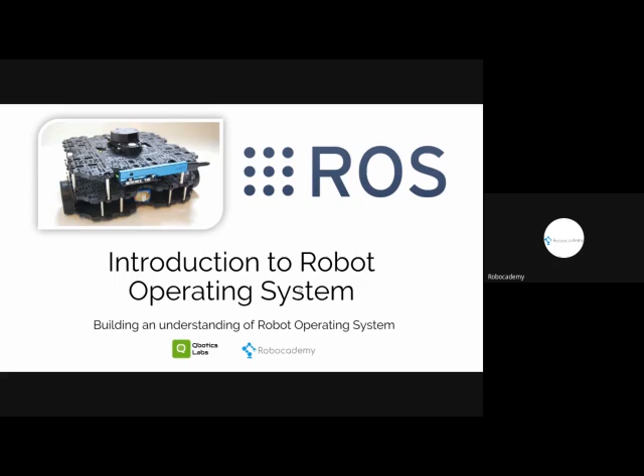Okay, fine. So myself, Lentin Joseph, I used to write books on ROS. I have written about 8 books. These are the titles. All the books are related to ROS: Learning Robotics Using Python, Mastering ROS for Robotics Programming, ROS Robotics Projects. And I also used to review books in robotics. So these are some of my books, and these are some of the books that I reviewed.

Regarding my experience, I started working in robotics in 2010, from my engineering project itself. After that, I worked for a robotics company called Asimov Robotics. You may have seen some news nowadays regarding a robot called KARMI-Bot for COVID patients. So I worked in that company, and in 2014 I started Qbotics Labs. It's mainly a robotics consulting firm, and after that I worked 6 months with CMU for a research project.

And this is my blog called Robocademy. It's mainly for sharing robotics tutorials, news, etc. This webinar will be based on my book called Robot Operating System for Absolute Beginners. It's designed for people who don't have any idea about ROS.

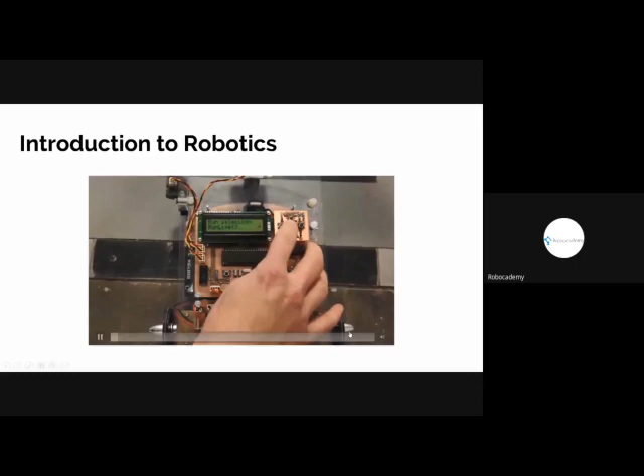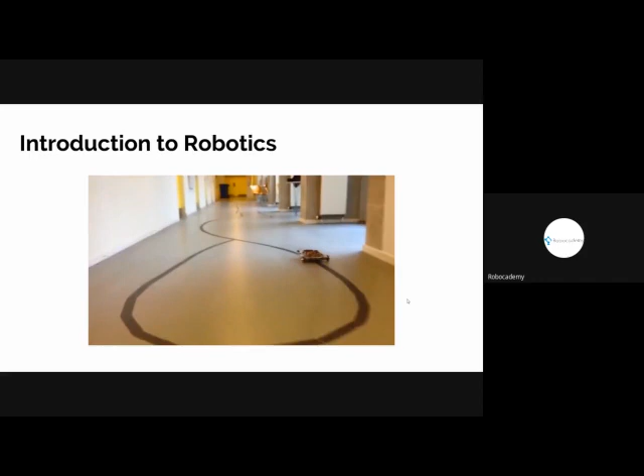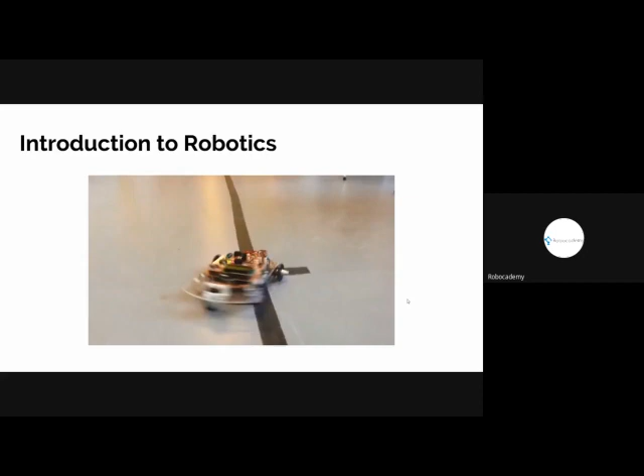Okay. So just watch this video. I think you can all see this video now. So how many of you have seen this kind of robot? I think it's very common. It's called a line follower robot. The purpose of this robot is that it just follows the line using some sensor, right? So I will say this is one of the basic robots that we can make, a line follower robot.

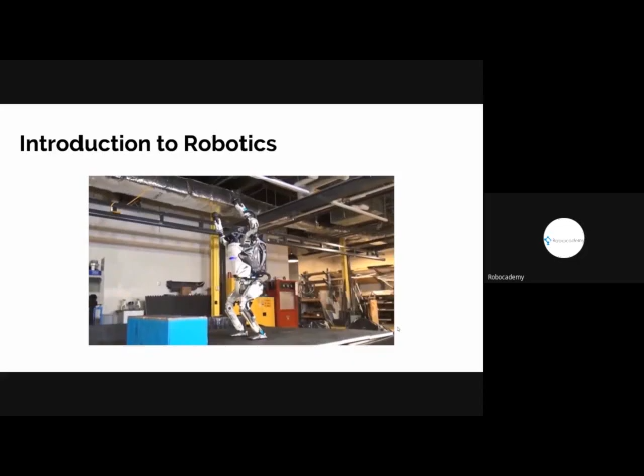What about this robot? I think some of you have already watched this video. It's a robot from a company called Boston Dynamics in the US. It's a humanoid robot, and it's backflipping, right? So it's doing backflipping. I will say this robot is very complicated, very complex, but we are calling this thing a robot too. So we have seen a basic robot as well as a complicated robot.

So I have shown that video for comparing the basic robot and the complicated robot. What are the functional units of each robot? If you take the basic and complex robot, the basic blocks are the same. So what are the basic blocks? The basic blocks are the three main blocks.

The first is sense. I think someone's mic is on. Can you mute? Okay, now it's fine.

Okay, so the three blocks are sense, think, and act. So what is sense? It's sensors. A robot will have a lot of sensors. In a line follower robot, it may be an IR sensor for detecting the line. In the Boston Dynamics robot, it may be some camera, inertial measurement unit, or some other sensors. So that is about the sense unit.

And what about think? Think means it's a computing unit. In this unit, the robot is actually taking decisions based on the sensor inputs. So it's our computer actually. There are different types of computers: there are mini PCs, microcontrollers, and a lot of other types of computers. So that is the think section.

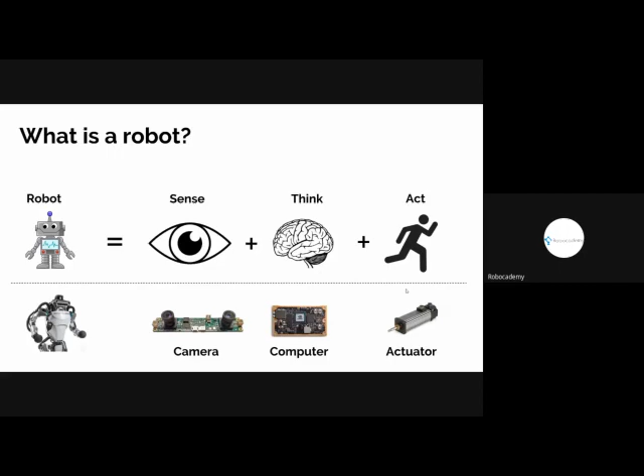And what about actuators? The actuators are simply the motors. These actuators are executing the motion of the robot. For example, in the case of the line follower, it is two motors. That is the act part, that is moving the robot. So the think unit will take the decision whether it is a line or not, and the sense unit will sense the line.

So I'm just explaining again because my mic was on mute.

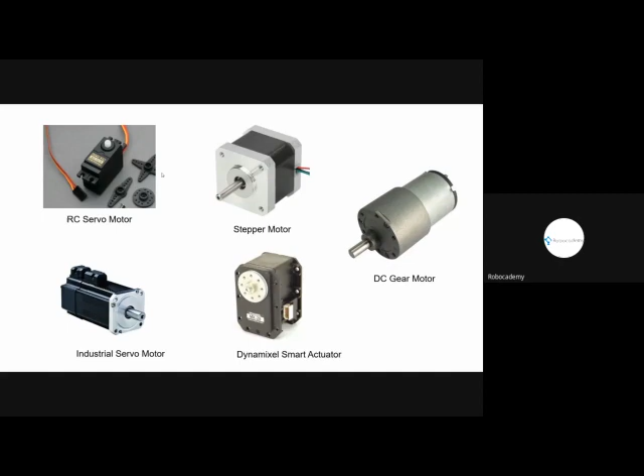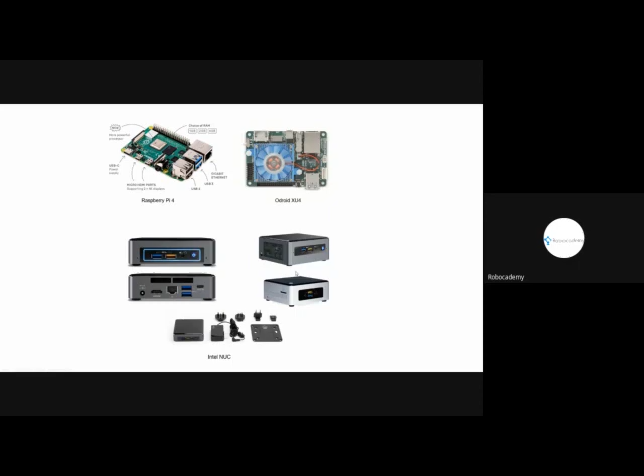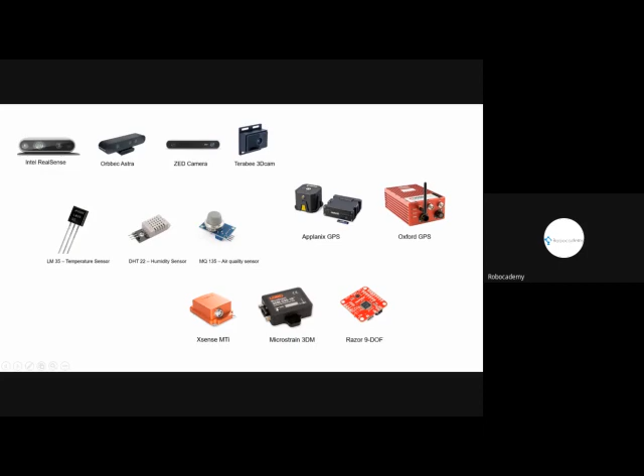So I explained the block diagram of a robot for explaining robot programming. We have seen the sense, think, and act sections. So which block is more important? I will say all blocks are important. For example, in an obstacle avoidance robot, if the sensor is not working, then it will be non-functional. And motors are also important. The computing units are also important. But who is deciding the behavior of the robot? I will say the think section. The think section is taking the decision, like whether there is any obstacle or not, if the robot is on a line or not. So we are focusing on that think section.

Think means inside the think module there are computers. So robot programming is simply the programming of robots, mainly using these computers. We can use a microcontroller, a Raspberry Pi, Arduino, anything. So in a definition, robot programming is modeling the behavior of a robot. We have a set of programming languages like C, C++, Python, etc. So we actually model the behavior of this robot using a programming language.

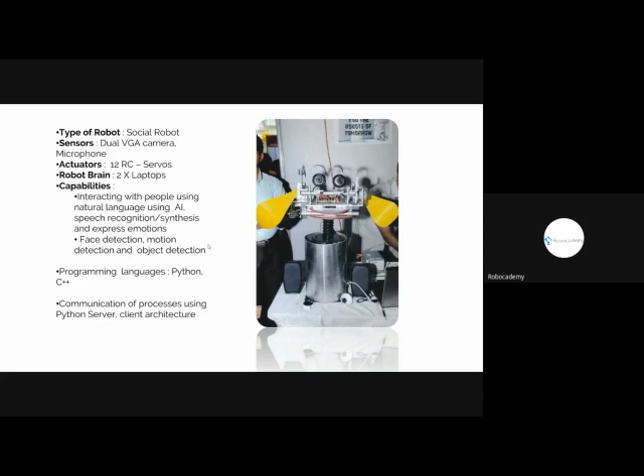So this was one of the projects, and I can show you some of the challenges I faced during building this robot, mainly the software. I mentioned that this robot has two laptops, one for speech recognition and one for machine vision, and there are a lot of processes, a lot of programs running.

One is for detecting faces, one is for speech detection. So I think there were 10 programs simultaneously running for working. The problem was I needed to communicate from program A to B sometimes. For example, I need to send some data from the machine vision program to the Arduino program.

For example, imagine you want to do face tracking. The machine vision program will sense the face, detect it, and send the centroid of the face to the Arduino program. So the Arduino will move the face of the robot. There is a lot of communication happening between programs.

So that was one challenge I faced. It's very difficult to synchronize all these programs. Also, the code was not modular. I used Python and C++, around 10 programs, so it's not modular at all. It's very difficult to reuse the code. If anyone plans to reuse it, it's very difficult.

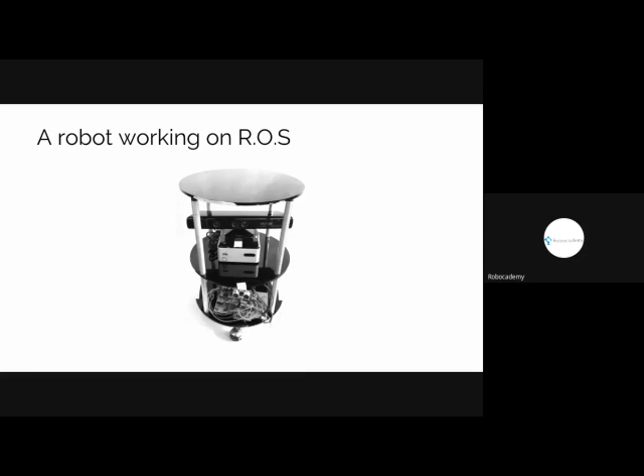After my project, I created a new project using ROS. That was an autonomous mobile robot I did in 2014 or so. While doing this project, I used ROS for working. Again, it's a complicated robot that can deliver food and move from A to B autonomously. It has a 3D depth sensor, maybe you've heard of Kinect, an Intel NUC, and some microcontrollers.

So I used ROS, and I didn't face this issue with ROS. I'm just showing the differences. If we are using an existing robot framework, the process may be simpler.

So then the definition of ROS - maybe I can take it from the official website after discussing this. ROS stands for Robot Operating System. Is it a real OS? No, it's not a real OS. It's a meta operating system, meaning it's not a real OS, but it has the features of an operating system. It needs a host operating system to run, meaning it works on top of a host OS, for example Ubuntu. The main core part of the ROS framework is the middleware, the communication middleware.

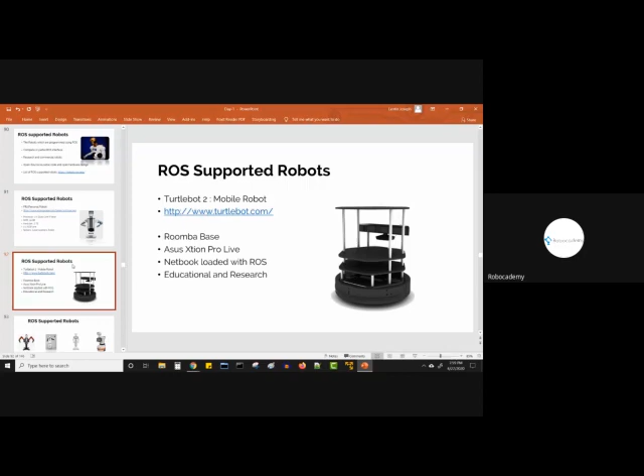And this is the affordable one, this is Turtlebot. It's a mobile robot, mainly used for educational purposes. Mainly what we can do with this robot is navigation, autonomous navigation. It costs around 1 lakh or something, but we will get cheaper platforms lesser than the cost of a Turtlebot.

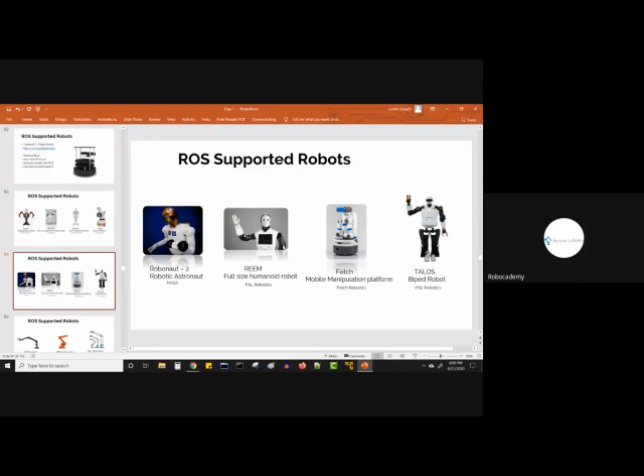These are some other robots: Baxter, Pepper, Tiago, and Robonaut 2 is a robot from NASA. Then Fetch, TALOS—these are some famous robots working using ROS. These are some mobile platforms supporting ROS: Pioneer 3DX, Husky.

So we have seen the robots supporting ROS. Now I think we can see some of the sensors that support ROS. Sensor supporting ROS means this sensor is compatible with ROS programs. So these are some of the sensors. I think you may have seen that 3D mapping of a city, which can be done using Velodyne.

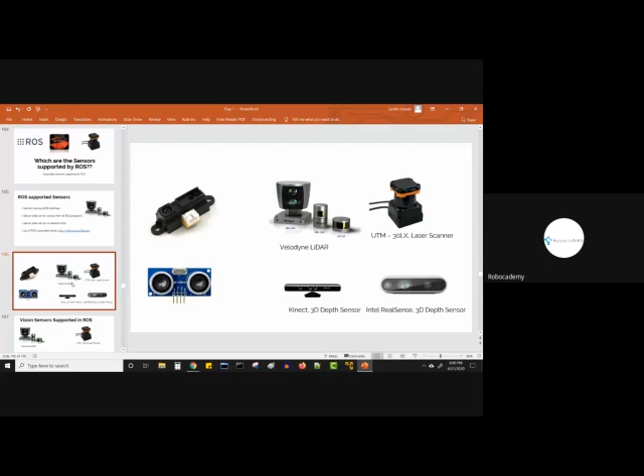Then the Kinect—these are all 3D sensors. These are some other 3D sensors. Even the camera is a sensor. Then the IMU. So these are some of the microcontroller boards supported in ROS.

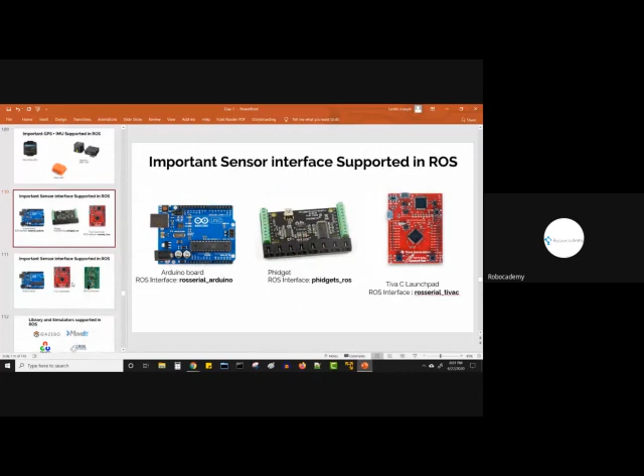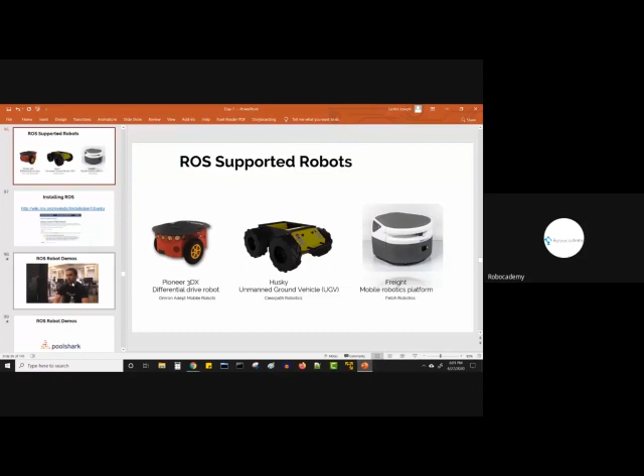So we have seen robots and sensors that support ROS. Now we can see just the installation procedure of ROS, just the installation procedure.

I'm just going to the ROS website to install. So if you go to the ROS website and install, you can see the ROS distributions: Indigo, Kinetic, Jade, Lunar, and Melodic. So here's the latest Melodic, and install.

So you will get the procedure for installing ROS on Ubuntu. It's very simple: just copy paste these commands on your Linux terminal and ROS can install.

But make sure before running on your real system, I will prefer you to work on virtual machines. Virtual machines are software that let you install the operating system virtually. So like this, I'm just switching on an Ubuntu 18.04 OS.

It's just booting up. So the advantage of using virtual machines is it will not create any problems. If you are a beginner and start installing Linux on your real system, it may crash your hard disk or crash the PC. So it's better to work with virtual machine software like VMware, VirtualBox, etc., install Ubuntu on it, and you can install ROS on it.

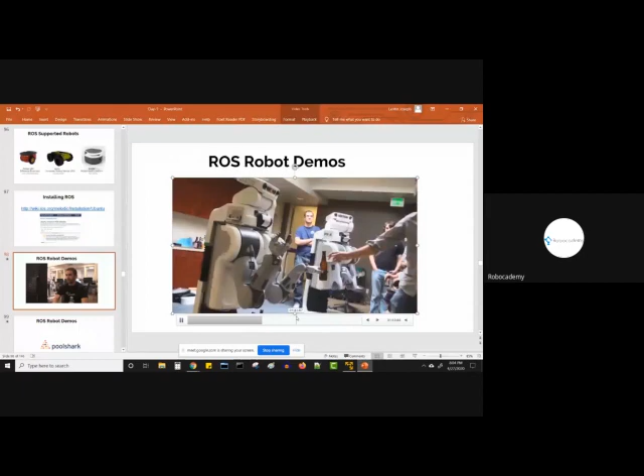So these are two virtual machine software that I'm preferring. So now we can see some of the demos done using ROS. In this demo, which was shot in Willow Garage, they're creating an application using ROS for fetching the beer from the refrigerator. See, the robot is fetching the beer and supplying it. All these capabilities are done using ROS.

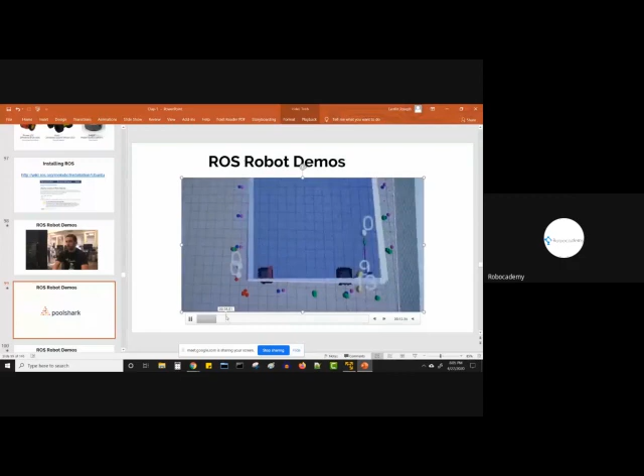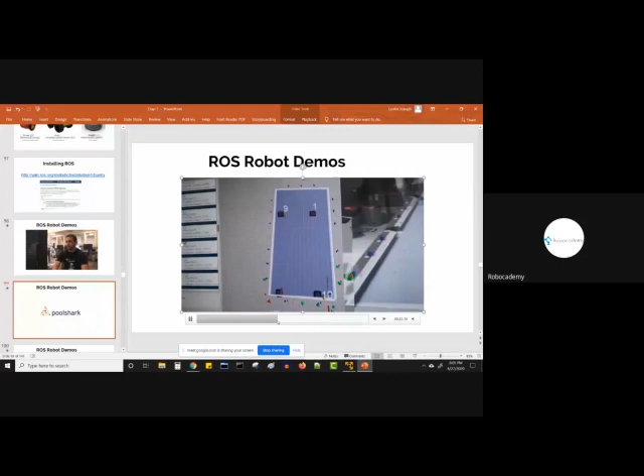Then in this demo, the robot is playing pool. See, it is automatically doing it. The algorithm is running in the background, and using some image processing, the robot can play pool. The entire software is done using ROS. So these are some examples; I'm just showing the capabilities.

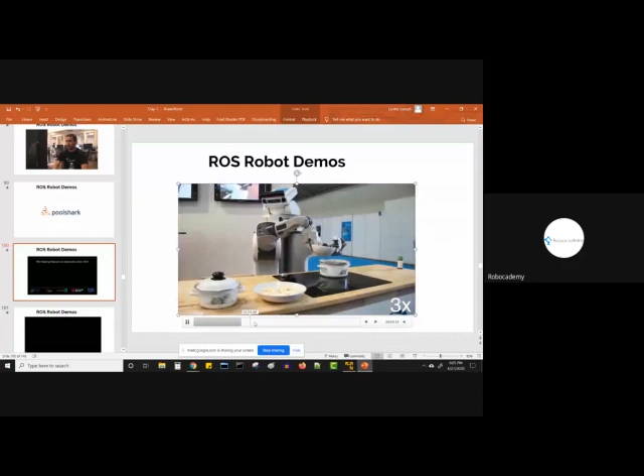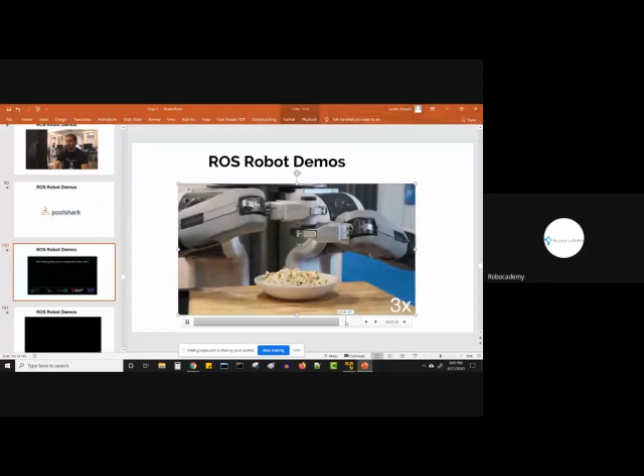Then a popcorn making video. In this, the robot is making popcorn. All the software is written using ROS. I'm just quickly going through the videos because we don't have enough time.

This is another demo using the ROS navigation. See, the robot is navigating autonomously. It is creating a 3D map, avoiding the obstacles, creating the map.

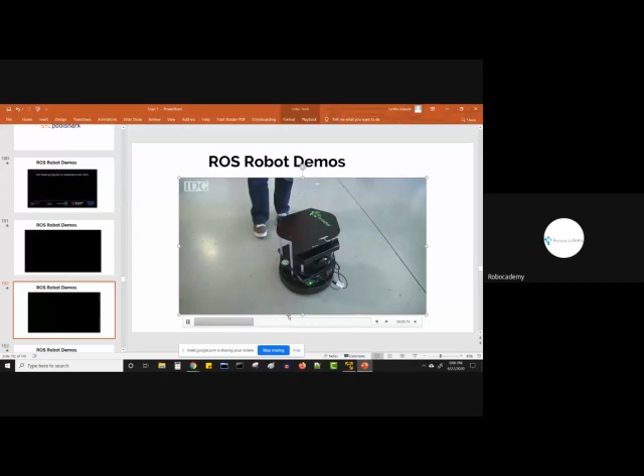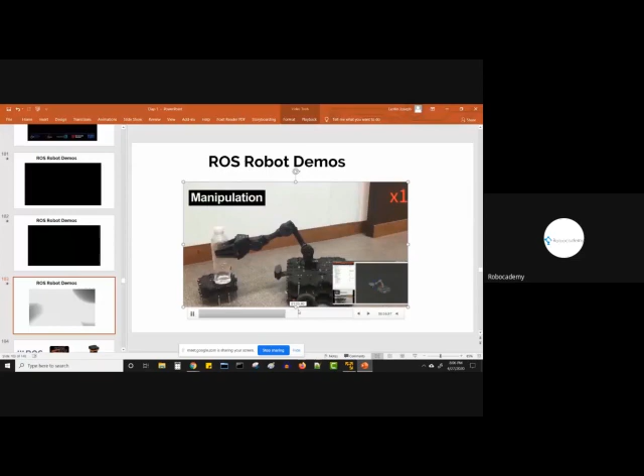Along with ROS, you will get support for Gazebo. It's a robotic simulator, a software in which we can virtually simulate the functionality or working of the robot. The advantage of simulation software is that before making the hardware, it's better to create a simulation so we get to know the issues in the robot design. That's why we use Gazebo. Then MoveIt is for manipulation, OpenCV is for computer vision, ROS Industrial is ROS software for industrial robots, then the Point Cloud Library.

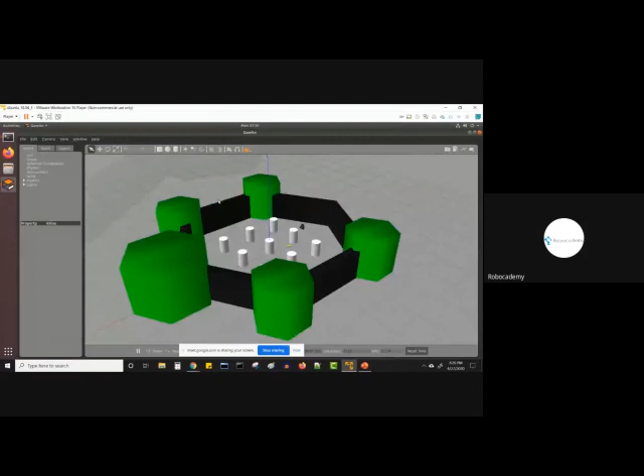So this is a simulator called Gazebo. In Gazebo, you can see the simulation. You can create simulations. And here is our small robot called TurtleBot 3. It has 2 wheels, and on the top of the robot there is a lidar. Let's see how to move this robot. And we can also see the sensor data from this robot.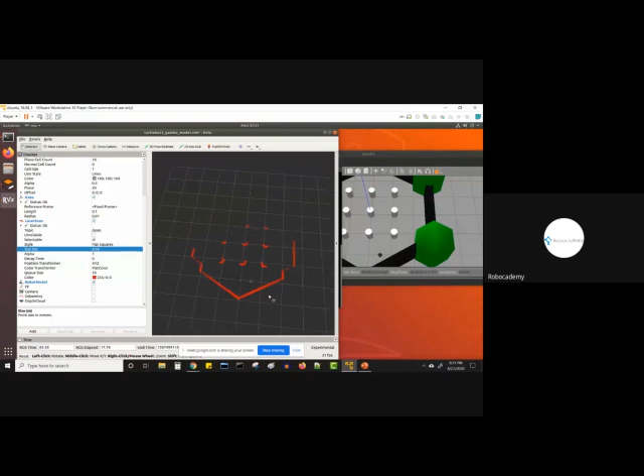So this is a simulation, and in this simulation, there is a robot, and on the top of the robot there is a lidar sensor. It's a 2D rangefinder, and you are visualizing the lidar data in RViz. So that is the importance of RViz. You can also visualize the robot model here. See. So let's move the robot.

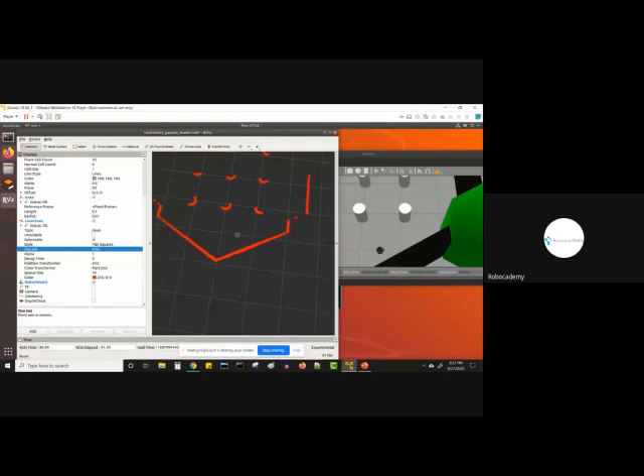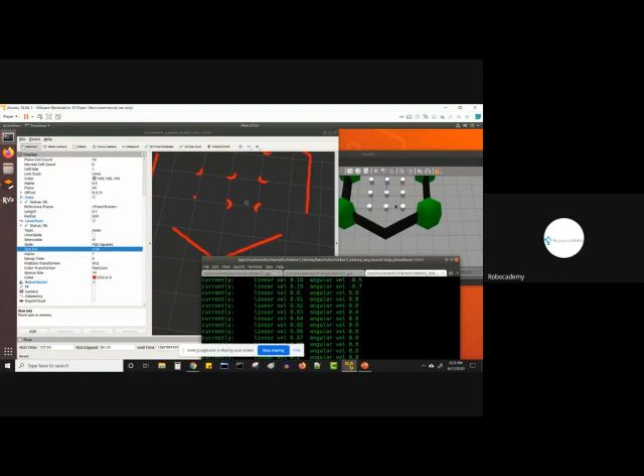So using the keyboard arrows, you see the robot is actually now moving. You can see it in the simulation and in the visualization also. So what happens if it hits the wall? See, there is a crash.